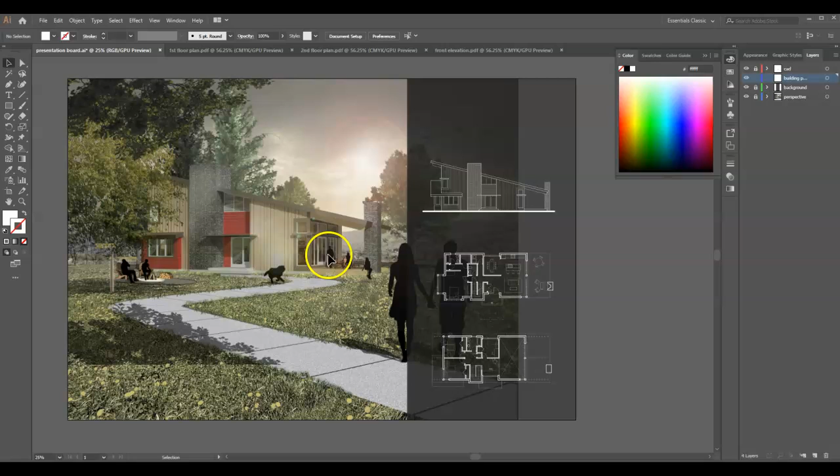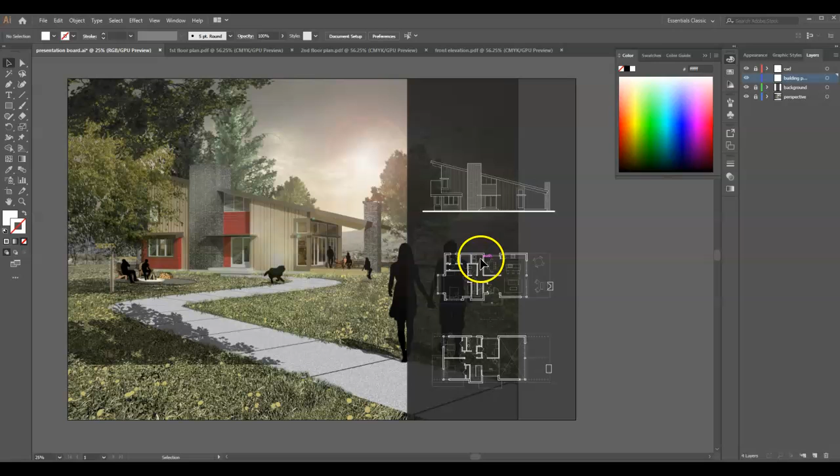Now what I'm going to do is set my fill to white and my stroke to nothing. I'm setting it to white because I have white lines with a dark background. If you have different colors, if you have black lines, you might set it to a light gray or even black, because we can use transparency to lighten it, as we'll do here. You might not even choose to do this step at all—if your plans are reading really well as is, you might not need to add the building poche. But stick around, because the wall poche is probably still pretty needed.

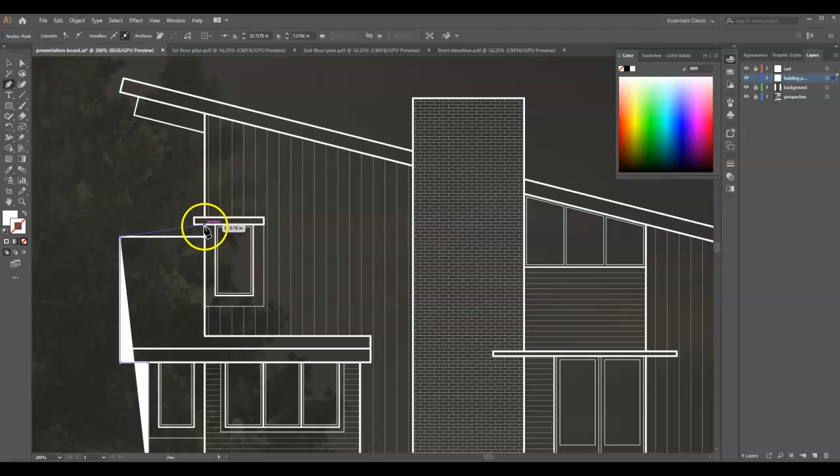So I'm going to go ahead and trace out my elevations and my floor plans. Pretty simple, I'm using the pen tool. I'll zoom in and just click around, following it. When you use the pen tool at first, it's going to be a little awkward because the fill will jitter around. But as you get closer to finishing the trace, it will look correct. You just have to trust yourself with this.

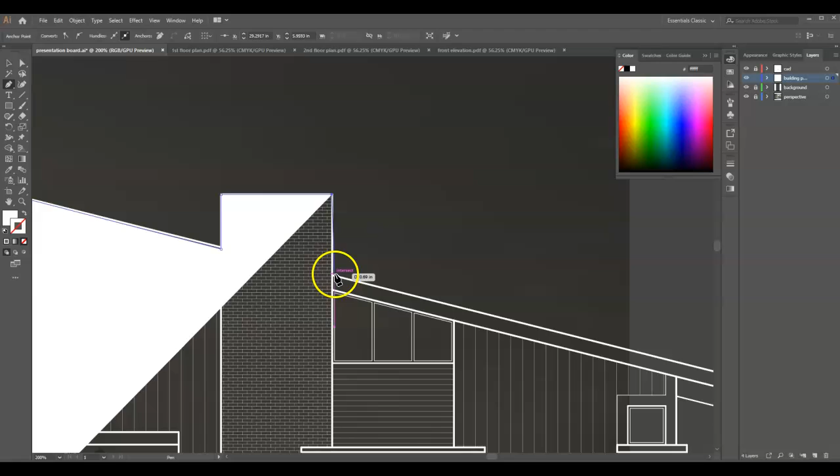So we're going to come up and come around, and it'll take a few minutes here. Ooh, this is going to be a good lesson—I'm realizing we're going to have to do a cool little thing to cut that hole out. I'll show how to do that. There are different ways of solving that problem, but we'll come here and do this.

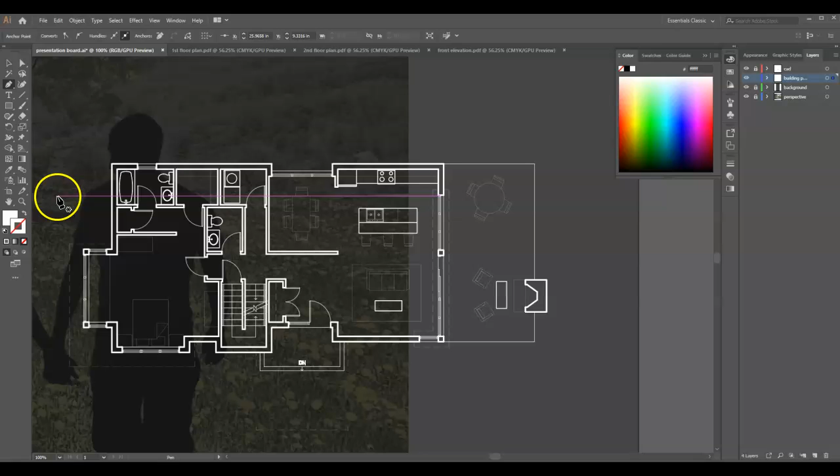What I'm going to do is pause the video. You don't need to see me trace out the floor plans—it's the same as the elevation. I'll simplify the video and come back.

All right, so I've poche-shaded the whole building as is. Obviously, we can't see anything. If you haven't guessed it, what we're going to do is select all that poche shade you just made, and we're going to add some transparency to it.

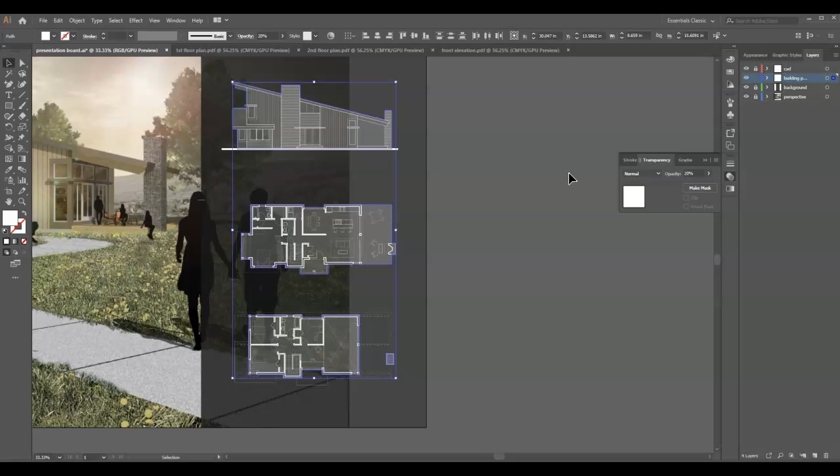I'm going to only need a little bit of transparency in this case—it looks like around 20 might be good. You can play it back and forth and see how you like it. You can already see, when I do that, I can really start to read these buildings quite cleanly now.

I'm going to go ahead and lock this layer because I think it looks good, and I'm going to add a wall poche. So I'll make a new layer and call it wall poche. Essentially we're going to do the same thing down here in the floor plans, because we really want to make the wall stand out and read strongly. I'm just going to add another white trace around all my walls, and adjust the transparency as needed. I might not need any transparency at all—we'll see how it goes.

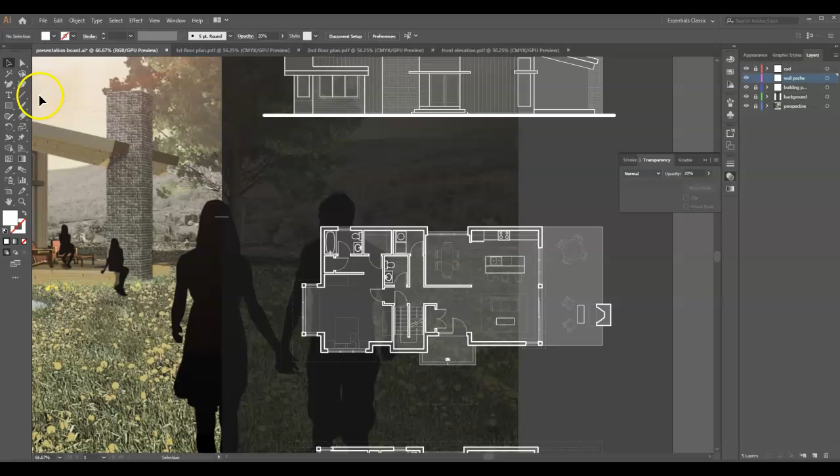Then the walls will really stand out as a nice poche, and I should get a good reading. Now, there are multiple ways of tracing out the walls.

The simplest thing to do, though it will take some time, is again to use the pen tool and just trace around the objects just like this.

Of course, if you get into a case where when you click, you can't see your next bunch of clicks because I have to go back this way since I don't want to poche over the windows, you can do this right here temporarily: hit the slash, and you don't see the fill anymore.

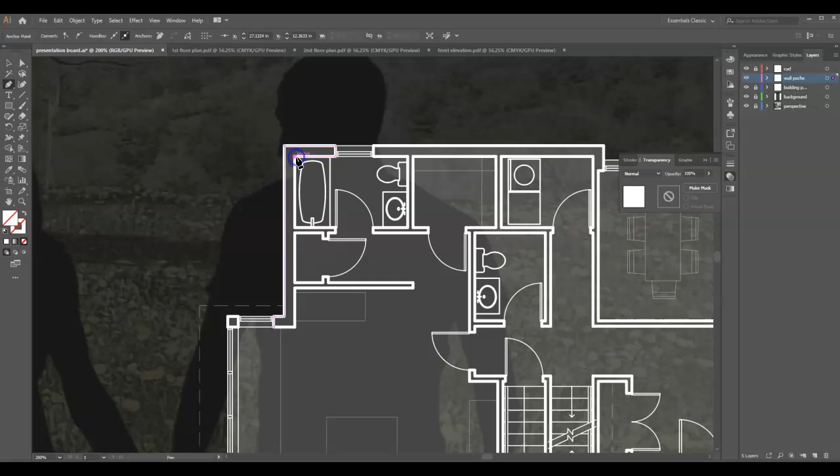And you can come around and really do this in pieces. But if you're good, you can see I actually can get all of this wall, down the wall, and around the door here, all in one go.

Even though we don't see anything because I'm not filling it, I am making the shape. So just give it a second. You'll see how I'll get the white fill back. Click around to the start, and then I can just hit this button to go back to the color, and you can see now I've got the poche filled in there.

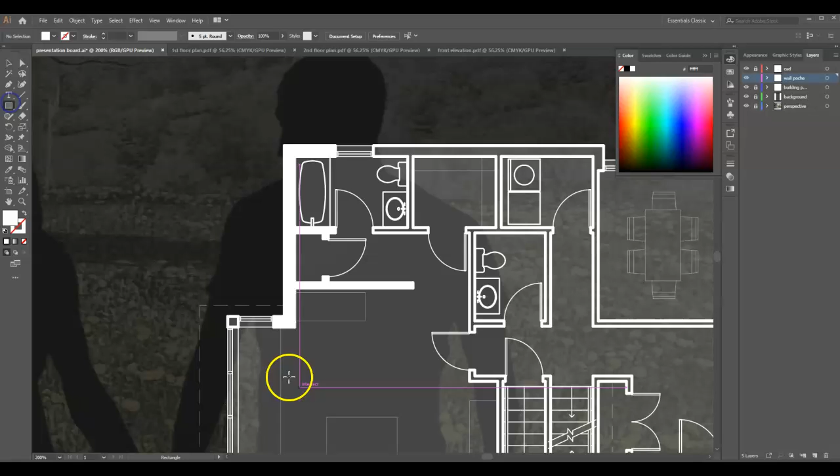So I ultimately have to go around and do all these things for squares and rectangles. I could simply use the rectangle tool and fill them in quite quickly.

And it's going to take a few minutes, yes, but again, as I always say, good drawings do take time. Just because we're doing this in the computer doesn't mean things are going to be instantaneous. If you're looking for something to be instantaneous, it's probably not going to be as high a quality as you can get it.

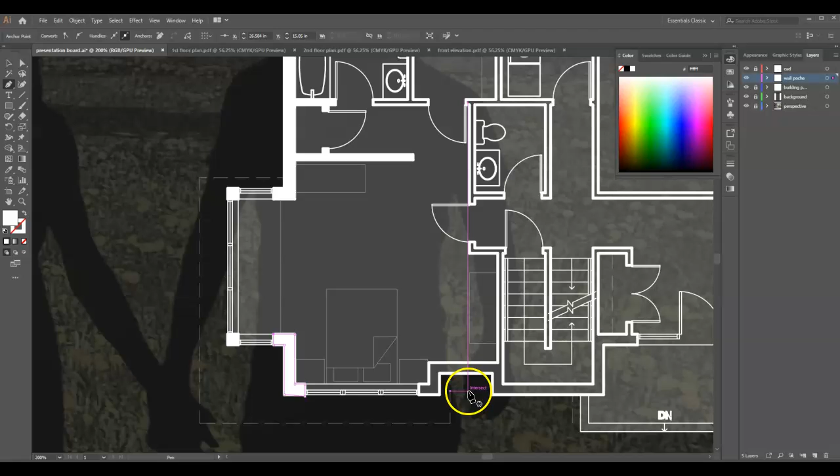Of course, there's also no reason to watch me poche all my walls. So what I'll do is, like before, I'll just stop the video and come back once I'm done pocheing. You go ahead and poche all your walls on your end. We'll finish up this video with a few more tips when we get back.

All right, so I finished poching all the walls, and in this case, the chimney and things. You can go ahead and make some decisions again. I think I might just, for the fun of it, add some slight transparency to mine.

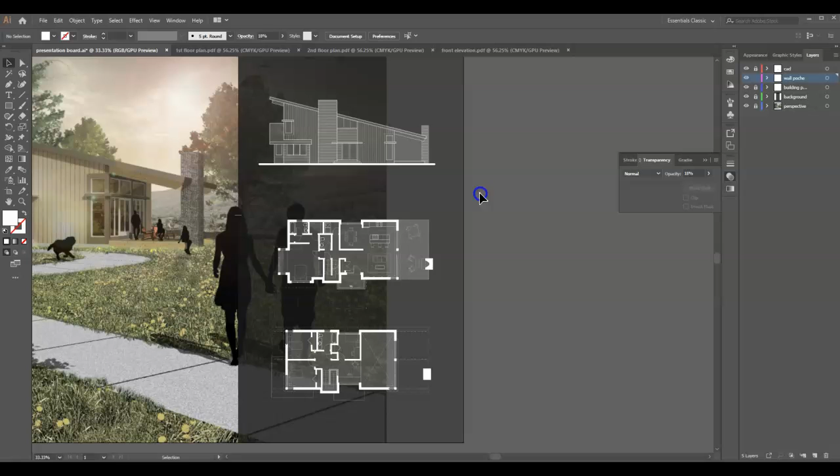So I'm going to select it all, go to my transparency, and I don't know how low. I might just test. A lot of it is just going back and forth and testing. Even that low still makes the wall stand out pretty decently, but I think I might just up it a little bit. I'll try 30%.

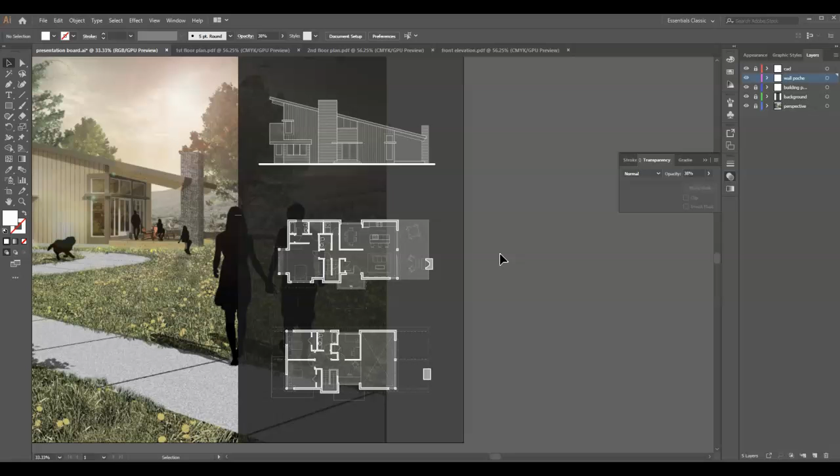Anyway, give it a go and see what you like for yours. Different colors and all these things really do make a difference.

One thing I should say is I have a few mistakes in the poching that I did, both for the building and walls. So if you have mistakes along the way, I'm going to review how to fix those now. You can go back and fix them or change them as needed.

One is we can see for my building poche, this is not actually building, this should be hollow. So I'll show you how to do that. I have a mistake in some of the wall poches down here and here. One has to do with extra transparency, one has to do with hitting the wrong spot. I know we're so far zoomed out we can't see it, but I'm going to go over those.

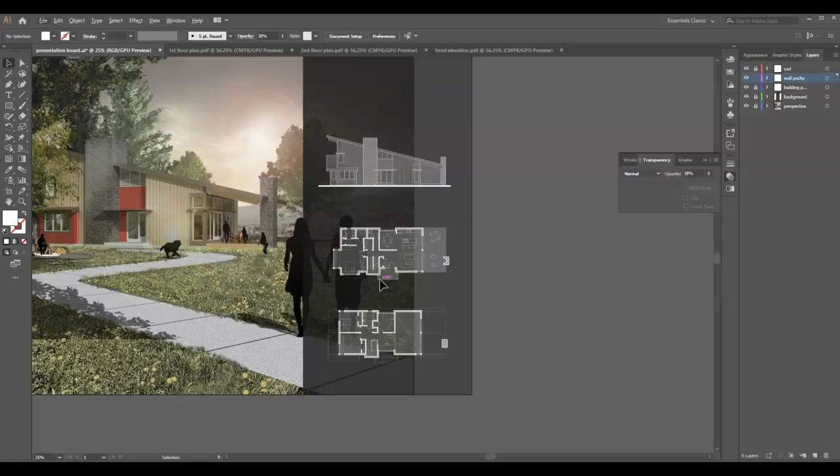So I'm going to do this one first. If we come down here in my wall poche, we see that right here is a little bit brighter. And the reason for that is I messed up.

I traced out this wall but didn't realize it connects into this wall, and then I traced out this other wall, and there's an overlap. Since there's transparencies on it, the overlap becomes brighter.

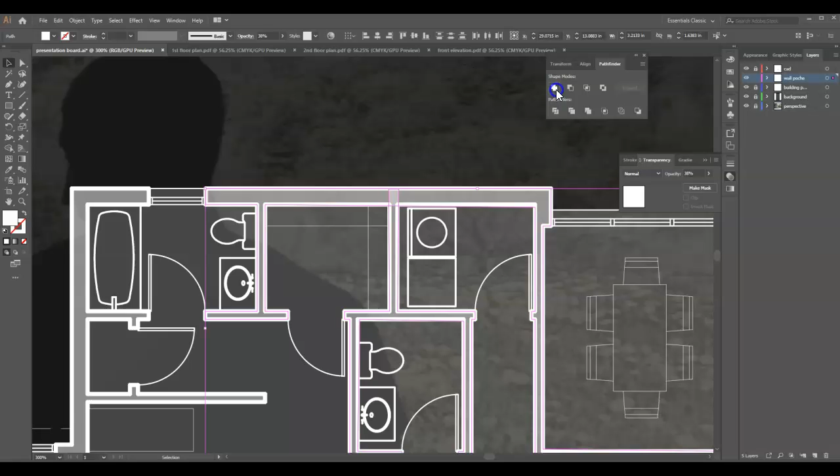We can fix that by simply merging this into one form. Go to Window, go to Pathfinder, select the two forms you need to combine into one, and unite them with this button. If you have that in multiple spots, do it once, go to the next spot, and do it again. Then you can see the transparency is nice and clean there. It's a cool little tool.

Down in here I sort of messed up my click. You can see some of these, if you see the purple line, sometimes you don't have to be perfectly centered or anything, as long as it's within the line stroke, that's fine. But this point should be way over here, and I have this empty space.

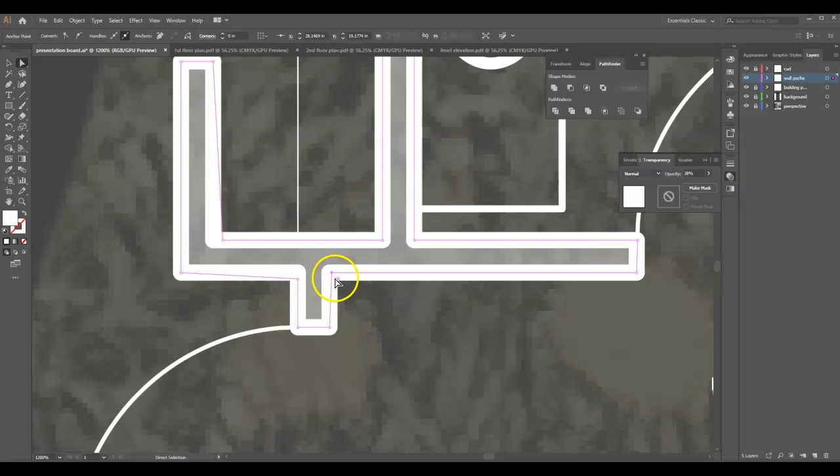So to fix that, you're just going to go to your white arrow, click on the point that needs to be moved, and move it over. I didn't make this mistake, but let's say you completely missed it. Give me a second, I'm going to show you the inverse of this.

You can actually add and remove points. Let's say you did that somewhere and you were like, oh no, I don't even have a point to move. All you need to do is click and hold over the pen tool, go to the plus sign, and click on the line. It's going to add a point.

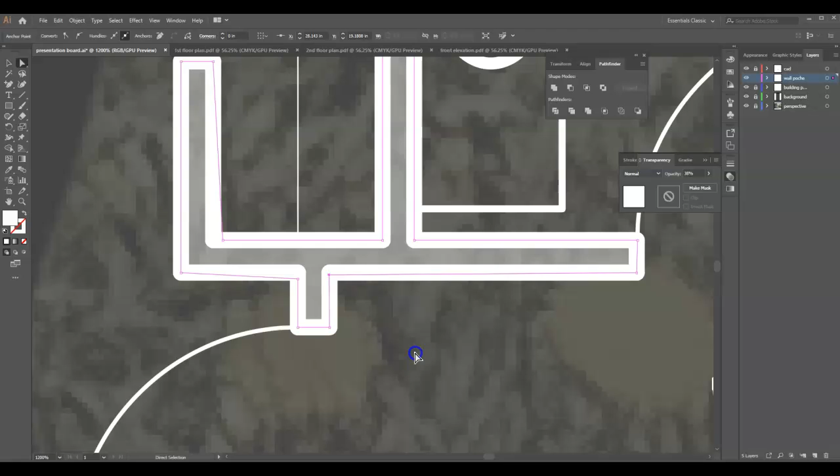Then jump to your white arrow, click on it. Once I click and let go, I find it selects it easier, then click again, hold, and move it into place. And there you go, so you can edit your fills as needed. Pretty simple, that's the great thing about Illustrator.

The last correction I want to make is I want to remove part of a fill that's internal, almost like creating a hole. There are multiple ways of doing this. I'm going to have to go to the correct layer, so I don't have it on wall poche, but I have that on building poche in this case, although sometimes you have walls that might need a hole like this.

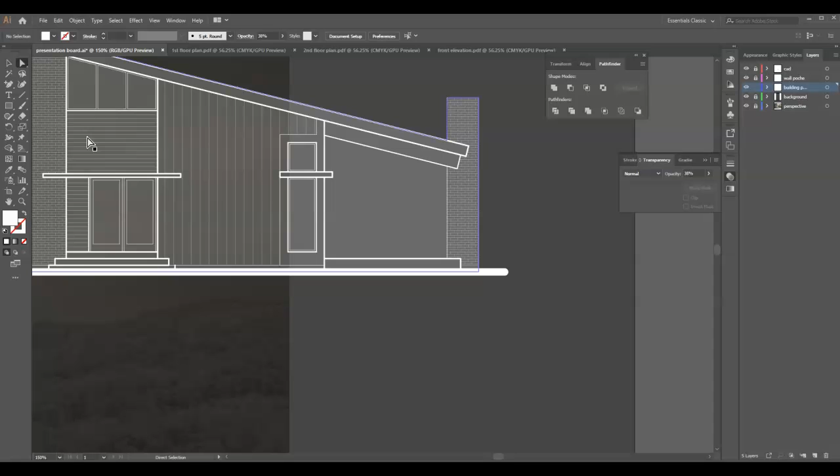I'm going to add the shape for what I want the hole to be, and it can be drawn in any color. It can be white like I'm working on, it can be whatever the case might be, even completely no fill stroke like this, as long as I've got the line shape traced out. So I'll trace out the line like that.

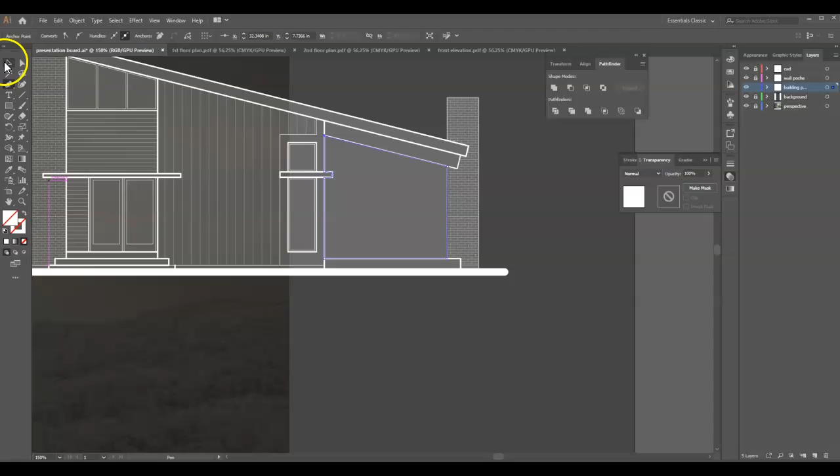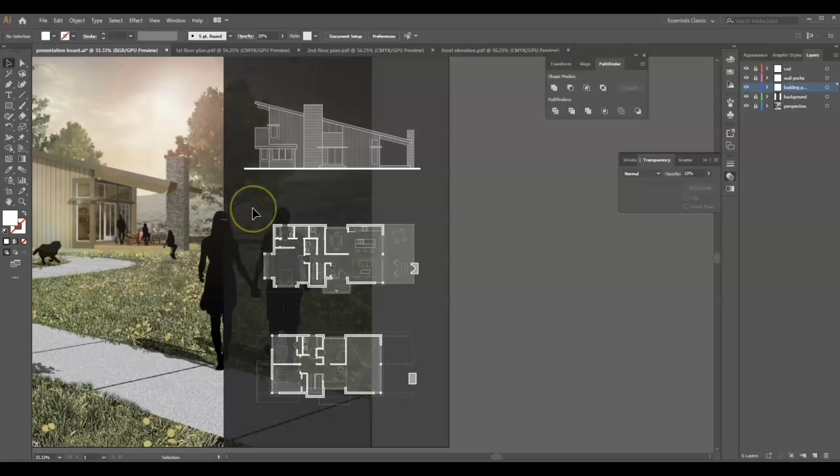Then I'm going to select both the shape I just drew as well as the shape I want the hole in. I'll right click and say make compound path, and we can see it's cut the hole in it. You can also use Pathfinder tools to do the same thing, but that's the quick way of doing it. So you can go ahead and edit those poches, and really make your plan stand out as much as possible.

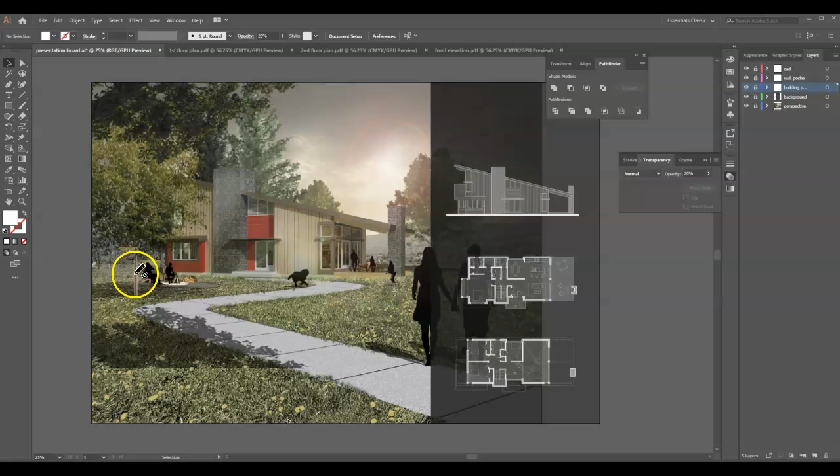With that, we've adjusted the CAD work and added poches to really make it look nice. Do what you think is best for your drawing, again everyone's can look different. We'll come back in the next video and talk about how to unify our drawing a bit more together with the perspective, the background, and the CAD work we've set up.